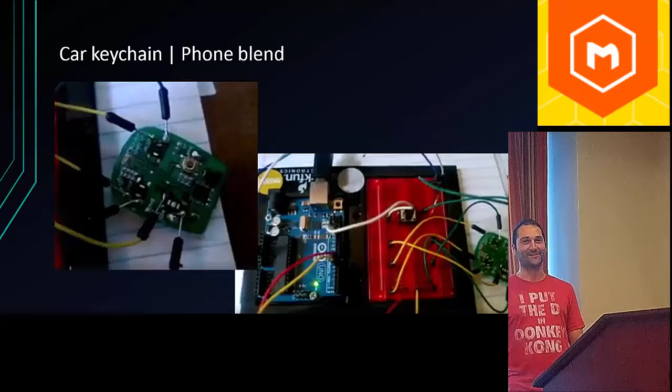So I did. I took it apart, and that little guy is what's inside, and I soldered some wires to it. Well, first what I did was look at the output of the buttons. I started hooking multimeters up to it and seeing what each contact point did, and I figured out that certain contact points went with others, and when you passed voltage through them, it made stuff happen. The car unlocked or locked or set off the alarm for an hour, and then I had to figure out how to turn it off, and that was fun.

This is a video of it. I don't think you're going to be able to hear it. I don't think we have any sound. But what I can tell you, maybe I do. Let's see here. Does the sound work in here? Do we know? It does not. Does not. Okay, so I'll just narrate for you.

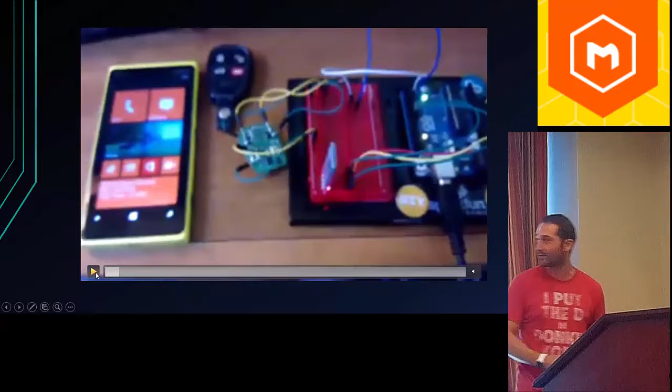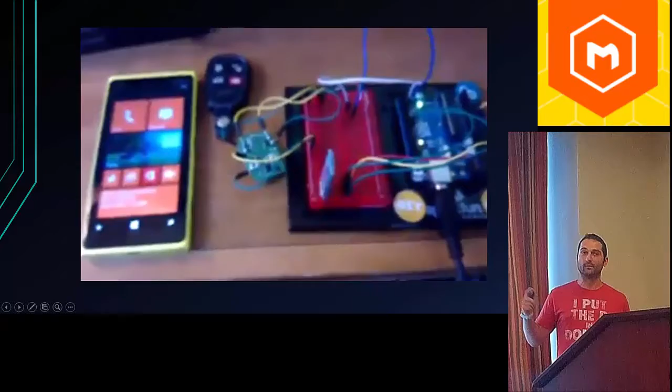That's fine. So I'm a big Windows Phone guy, so I had my Nokia there. The reason I mention this project - I've done a number of Arduino projects, and I won't go through all of them - but the reason I mention this one in particular is because this is the first one that I actually worked with Bluetooth with, and Bluetooth is actually a big part of the project I'm going to talk about today.

This little flashing thing over here, that's the Bluetooth card. It's really easy to work with. There's a serial library built into Arduino. You just new up a Bluetooth serial object and tell it the baud rate, and then you can read from it. It's pretty easy.

What wasn't so easy was the Windows Phone. Nokia was nice enough to make a free, open Bluetooth library that we can consume on the Windows Phone. I still use the same one today, and it's real nice. It makes it real easy for communicating with the Arduino.

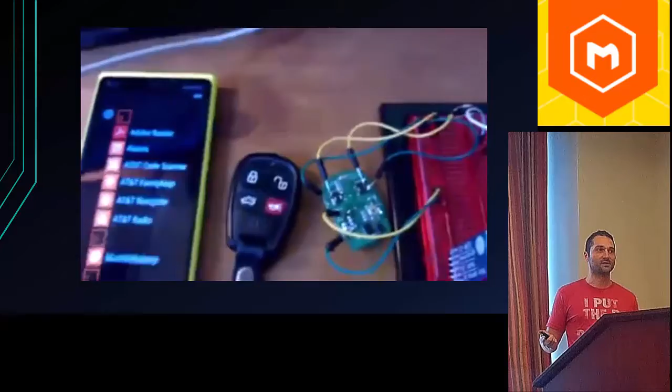And what I do is I just send a command to the Arduino to connect, and then I send a command to either lock or unlock. All that looks like in the code is maybe a number - I just send one byte, or a 2 or a 3 or whatever. And the Arduino deciphers that and then sets the digital pins on and off, and that's what shoots the car off.

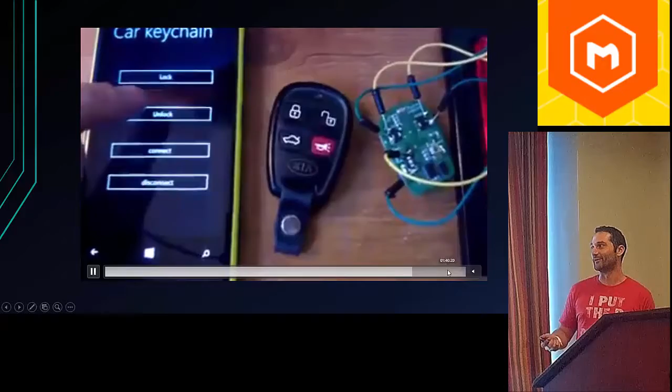And as I was doing this, my alarm was actually going off outside, but you can't hear it on the video. So I moved on to the next project.

So this is going to look weird at first, but I promise you, no dogs were hurt in the process of making this. I needed a camera to watch my dog while I was at work. And you're probably saying to yourself, but Anthony, why in the world would you want to watch your dog while you were at work? Meet ISO.

He's known as the destroyer in my house. ISO is playful, and ISO's fun. ISO's a very good dog. Just kidding. ISO likes to rip nose-sized holes in my blinds. ISO also likes to somehow chew up documents with a muzzle on. Don't know how he does that.

He also likes to create second dogs entirely by himself. That's a pile of fur about the size of him, if you can't tell. Just a side note, when I comb him, I comb until my arm gets tired, and then I stop, not until the fur stops coming off. Just in case you're curious about getting a husky, don't.

So the main reason I needed a camera, though, it really doesn't have to do with that stuff, because I get to find out what he does when I get home. The main reason I needed a camera is because ISO hates his cage.

That's a steel cage that he would stick his nose through to bend the bars, and then he would bite the bars, and then stick his nose through to bend the bars, and then bite the bars, and kept moving back and forth. He eventually broke the cage. He broke through the steel bars to the point where the only way to fix them would be to weld them back together. So I don't put ISO in a cage anymore. That's the long and short of it.

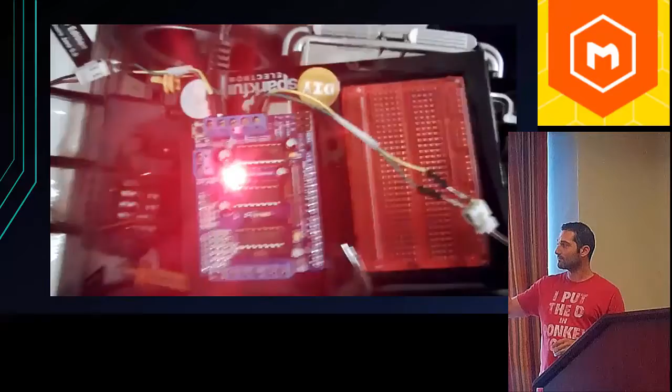This is the initial test of it. What you're seeing here - I promise the sound for the video isn't all that great, it's just the car going back and forth. This is an Arduino Uno, and I have an Adafruit motor shield hooked up to it, along with the front motors of the RC car.

Does everybody know how these motors work? The way these motors work is when you pass current through it in one direction, the wheels will either spin or turn left, and when you pass current in the other direction, they'll spin in the opposite direction and turn right. So it's entirely based on the direction of the current.

That's what the motor shield does - it allows you to pass current in both directions. You can't really do that with your Arduino alone; you'd need extra equipment. Also, the motor shield allows you to pass large amounts of current, since the Arduino limits how much current it outputs through its pins.

So the motor shield let me hook the RC car's 9.6 volt battery directly up to the Arduino, and it just pumps the current right into the wheels. That's what you're seeing here. I have the front motors hooked into one motor on the motor shield, and the back motors hooked into the other, with a program on the Arduino running that says drive forward, drive backwards, turn left, turn right.

And that's it. You can see my hasty power cable - that barrel jack, I love Scotch tape. I could probably put a child through college with the amount of money I've spent on Scotch tape. I use it for everything.

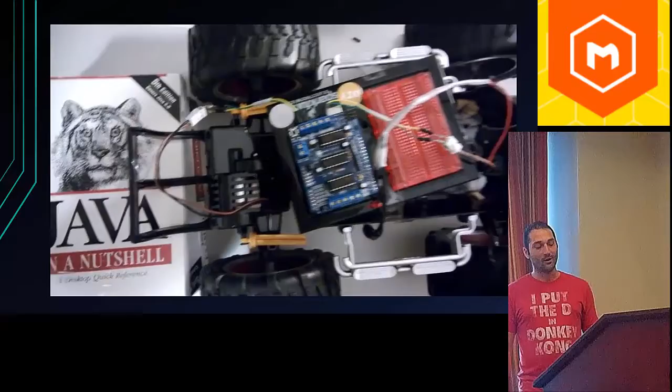When I'm soldering, I'll take the wire hooked up to my soldering iron and tape it down to my desk, so if I accidentally hit it with my leg it doesn't fly into my lap. One thing that doesn't protect you, though, is reaching over the soldering iron for a beer and setting your arm on it - this was a scar from like 2 years ago, so don't do that. Soldering irons get really hot.

The next natural step was hooking my phone up to it. This is the same Windows phone from before, the same Bluetooth library and everything, and I wrote an app that sent basic commands to the car telling it to stop, go forward, turn left, or turn right.

So you're just using Bluetooth to communicate between the phone and the car? That's correct. Now I've advanced the Bluetooth library a bit on my own - it was sending 32-bit commands, and I didn't need to send that much, so I reduced it down quite a bit, which sped it up.

Also, I don't wait for a response - that was one of the other things I heavily modified for this car. I think originally the library was expecting a response from the Arduino, which slowed down communication. I don't need two-way communication, I just need to stream out packets - hey, I'm pressing the forward button, hey, I'm turning left. If they get to the car, great; if they don't, whatever, I don't care if it drops, because there's another 50 coming right after it.

So then this really cool thing happened. This company - I can't pronounce the name of their device, it's Myo or something like that, a Canadian company, Thalmic Labs is the name of the company itself - sent me this really neat armband.

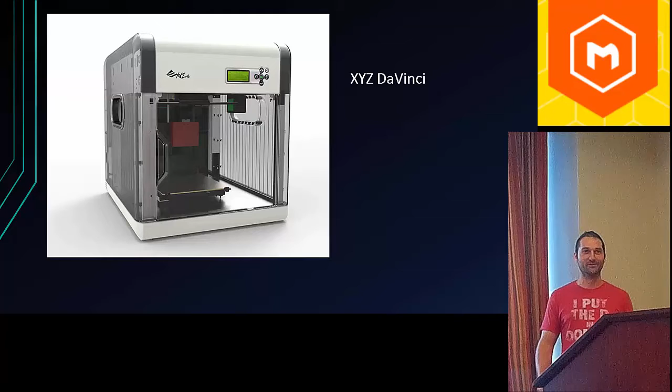One thing I didn't like about it is that they have proprietary filament - you have to buy their stuff. There are some hacks for it where you can get an Arduino; I think there's one on Hackaday where you can reset the RFID chip inside the proprietary filament cartridge, so you can buy off-the-shelf filament and just reload the cartridge. But 3D printing is so new and so open source, and everybody is building their own printers - there shouldn't be proprietary crap yet. We should be able to just build a printer. So that kind of irks me.

The other thing that bothered me about this printer was that it was huge, like huge, and it was cool that I could just take it out of the box and plug it in and it worked. The trade-off is that this thing is like a million pounds. If you're not familiar with the Cleveland area, Micro Center is on the east side, and I live on the west side, so I had to drive an hour to Micro Center, carry this giant box out to my car, jam it in my little Kia, and drive it all the way home. I live on the 2nd floor, so I had to carry it up 2 flights of stairs, put it all together, started printing, and it broke 7 days after I bought it.

So it broke in a manner that... now I'm a pretty resourceful guy. If I could have fixed it, I promise you I would have. One of the Y-axis motors didn't have enough tension on it, and this is a steel box. In order for me to rig it to have enough tension that it wasn't slipping, I would have had to drill holes in the steel box. It was a huge pain in the ass.

So I was like, you know what, it's only been a week, I'm taking it back. I had to carry this thing back down two flights of stairs, jam it back in my Kia, and drive it an hour back out to Micro Center.

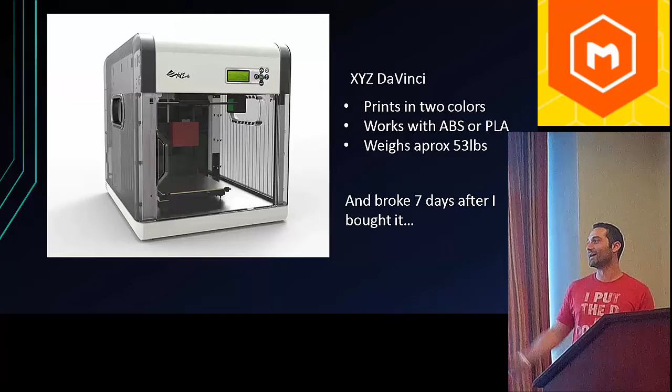It was horrible. So then I bought this, and this thing is awesome. If you get a chance to buy one of these, I would highly recommend it. This is called the PowerSpec Ultra 3D. This is the printer I've been running literally nonstop since November. You can ask my girlfriend, it's always going, you can hear it all through my house, it's ridiculous.

I love this thing. It's based on, so this is like the generic version, if you've heard of the company FlashForge, this is their design. I think Micro Center just kind of bought it, stuck their sticker on it, and made it a little bit cheaper. This printer is awesome. It has Wi-Fi, it has USB, it has an SD card.

The only downside to this printer that I've found is that the software that ships with it sucks, and I mean it sucks bad. The slicing software takes forever. If you don't know what slicing is, it takes the 3D model, the CAD that you make, and slices it up into like a million little pieces, and then you give that to the printer, and that's the layers it does. The software that the PowerSpec printer came with really sucks.

You can't add custom supports in the middle. So if you're trying to print something, and say for example I'm standing here and I needed extra supports from my shoulder to my head, I couldn't add those in. You can only add supports from the printing platform up. It was just bad news bears, don't get it.

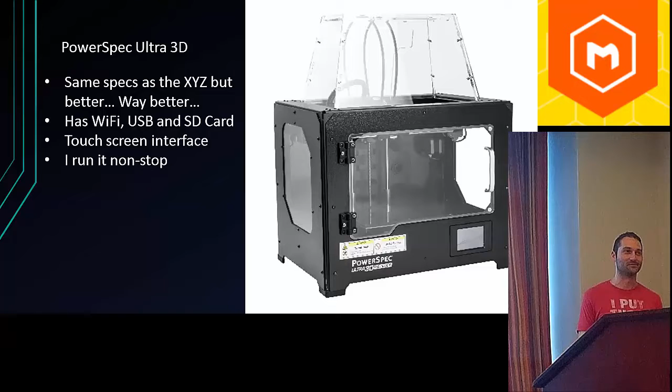So, yeah, those are the tools that I'm going to be using. The M series begins. This is going to be a series of cars that I made, starting with the original one that we just saw.

So I said to myself, anybody can make a kit. I want to build my own from scratch, down to the bolts. So I had some objectives.

The first objective was that it had to be totally designed and printed by me, because I like working with kids. I want to show kids that even somebody like me could build this stuff with free information on the internet.

It had to be easy to reproduce because, once again, I'm assuming people like me are trying to reproduce it. So it had to be easy to do.

It had to be totally open source. I'm not a huge open source guy. I work for a company where we have zero open source. I'm all for profiting, but I like giving back to the community. I think that's important, especially because we all stand on the shoulders of giants. I didn't write C or C#, but I use it all the time. So I feel like it's important to feed back into the community and help build the next generation.

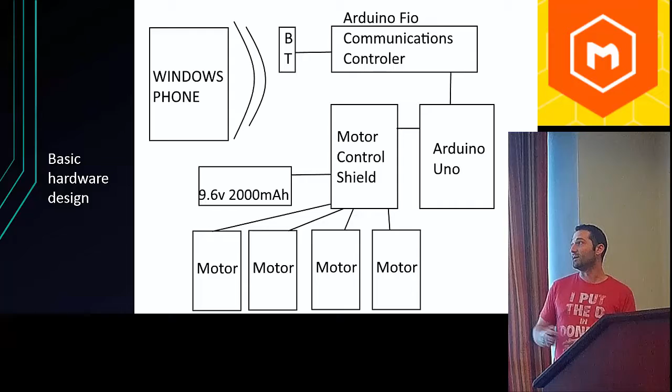The way that I have mine rigged up is, you'll notice here I have four motors, but two of them are plugged into one motor port and the other two are plugged into the other motor port. The reason I did this was because the left wheels are always going to be going in the same direction and the right wheels are always going to be going in the same direction, so why overcomplicate things? Just hook them all into the same motors, then I only have to manage two motor objects in code.

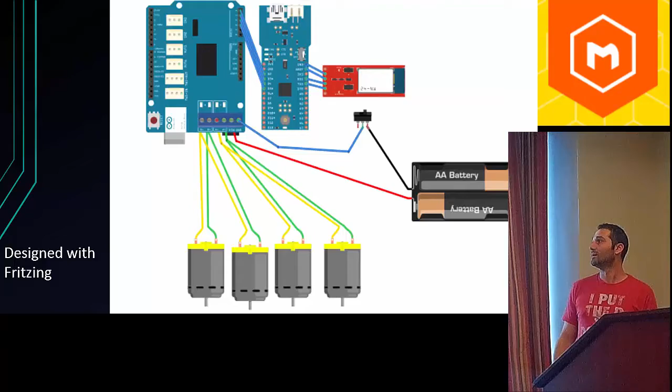And I have the car up here at the end if you guys want to come see it, you can come take a look. So now for the code.

I'll try and go quickly through this. I know we all love looking at code on PowerPoint slides. So the communication layer, I just managed one Bluetooth object.

So back up real quick. The Arduino has 3 main parts: you have your variables, your setup function which runs the first time you power the Arduino, and after that the setup function doesn't run anymore, it just loops forever while it's powered. So in your setup function, that's where you want to initialize your pins and objects, and then in your loop you're running conditions over and over again.

So in my communications layer, in my setup function, I initialize my Bluetooth object and set my 4 output pins. Then in the loop I check: do I have a packet? If I have a packet, I see what number is in there, and then I run the appropriate functions.

Here's my setup for the communications layer, the Arduino FIO. You can see I initialize the Bluetooth, then set my 4 output pins. The output pins are what we're going to tell the motor control what the user is selecting with. I don't know what order these are in because I didn't put the enumeration up here, but one is forward, one is backwards, one is left, one is right. At any given time, one will be high and the rest will be low.

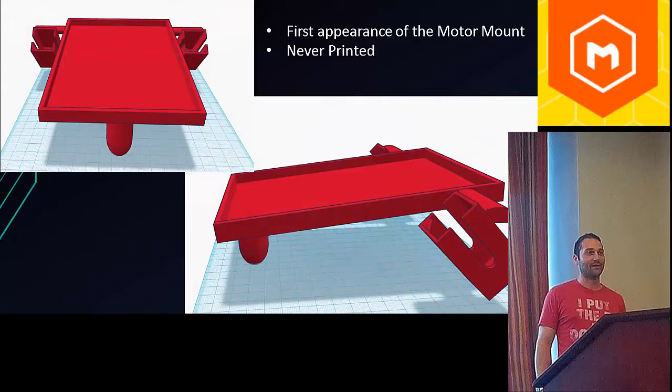So rule number 1 of 3D printing: respect thy support material. That is why this did not print out. Support material is what holds up your print as you're printing. There was no way I could print this without a ton of support material, so this never made it to the printer—it would have just taken a ton.

So I went back to the drawing board and said, okay, I need a modular design. I need to build the motor mounts separately, which means I need some way to fix them to the actual chassis. I didn't want to use glue or tape, so I needed clips or pins or something. And remember, I'm building everything myself. So I did the natural next thing.

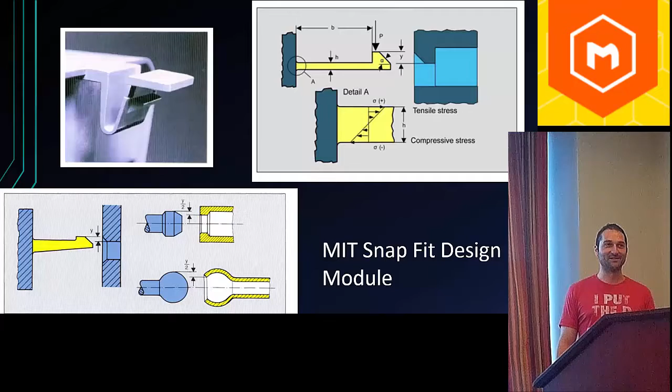I went to Google and found this MIT class, mit.edu. They did a class on snap fit joints and push pins. I started reading through that, and these are some of their designs. They go in nauseating detail about clip design, sizes of clips, angles, filaments, the amount of pressure you can put on clips, the length of the clip, etc. I didn't do all that—I just kind of made clips and saw if they worked based on their designs.

I actually used quite a few of these in testing. We'll see a few of them. That was the first one up there—a push pin, supposed to just push in. This one is actually a hook, supposed to go in and hook in. That sucked, so it never really got off the drawing board. This U-shaped snap I actually used in a couple prints—it ended up sucking. And then this T-slot I used also.

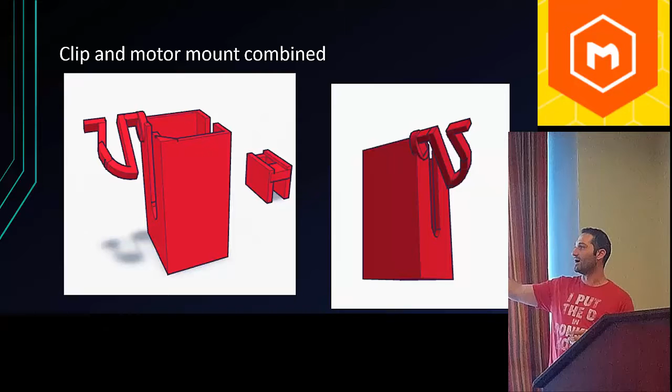And I moved on to the M3. By the way, I have an Iron Man-like fixation, so that's why everything is M—sorry, it's the Mark III. So I didn't like the original clips I did on the M2, so I moved on to using that U design snap. As you can see, I put the snap points on the corners, made sure they were evenly spaced, and everything was the right height.

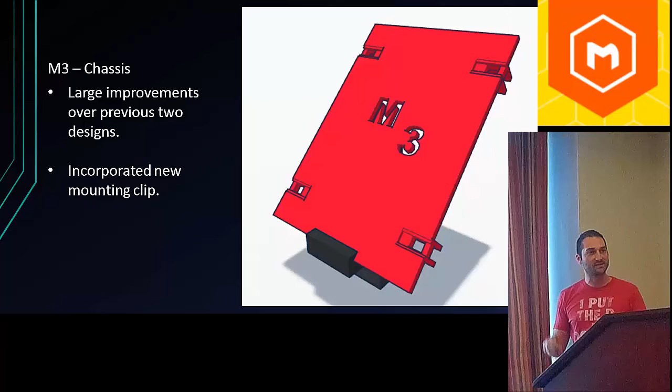This actually got printed, but once I printed it, it became painfully clear that when you apply weight to the top, the U-shaped snaps bow outward. That wasn't apparent in the design process because the CAD software I use doesn't incorporate physics. I had no idea until I printed this out and put it all together—I thought it was so cool, it works. Then I started putting the hardware in, and it bowed out, and I couldn't even drive it. I was so wrecked, because you're looking at probably 15 hours worth of printing, so it's on to the next.

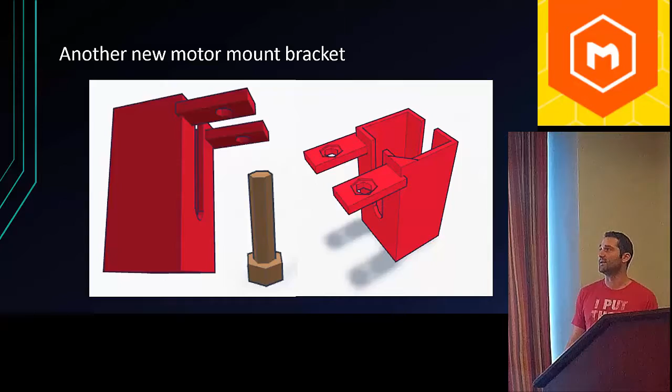So for the M4, I said, all right, enough with the clips, let's use some bolting design. I came up with this—I call it a gravity bolt, because if you turn the car upside down, the bolts fall out, held in only by gravity. I used this mounting system, and it actually worked really well. It created like a rigid body and kept the wheels pretty straight. I had to tweak it a little bit, but the mounts went in there pretty well, and I used this design for quite a while.

It worked by pushing the mount actually into the chassis. That was like a friction thing, and then I pushed the bolts in, and it held together really nice. So I was able to solve other problems, and I moved on to how I was going to fix the Arduino to the chassis.

The first thing I used, I don't know why, I'm a glutton for punishment. I went back to those U-shaped snaps and tried to use them to fix the Arduino to the body, but it wasn't happening. They wouldn't clip in. It sucked. So on to the next one.

The M5. For the M5, I used the same mounting for the motor mounts, and then I started using the T-slots to push the Arduino on and slide it in, and this worked pretty well.

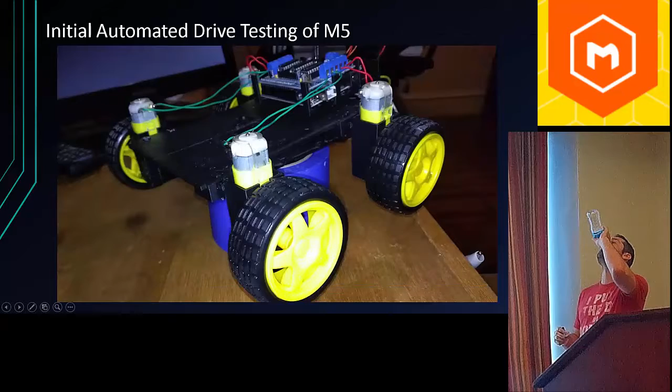The M5 was the first one that I printed out, coded, and actually drove. So here's early testing of it. Let's see it going here. So this one actually worked. I put it on the ground and let it drive across the ground, because that's the natural next step, and it worked pretty well.

So we got a working car, finally, right? It only took me 5 iterations, 5 different models, and I finally got something on the ground and running.

The next thing was to rework the Windows Phone app. I didn't have to rework it too much, it's pretty simple, just a couple buttons that you can drag your finger across. I wanted to keep the app as simple as possible because I remember how intimidating it can be starting out with Windows Phone, so I wanted people to just pick it up and go. So there's the app, pretty simple.

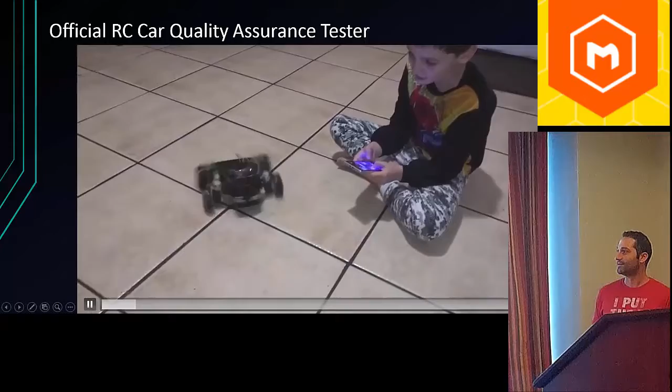And then I gave it to Troy, and I let him drive it around. Now you'll notice this is the M5, and you can see that the battery is actually hanging off the back of the vehicle. Probably not the best idea.

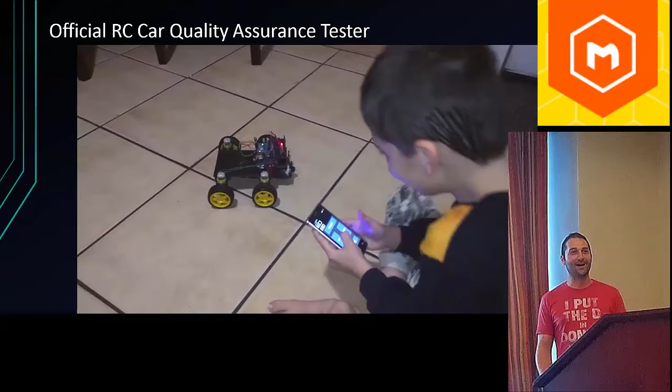Now you're thinking, why did you do that? That clearly doesn't make sense. Well, because I have an Iron Man fixation and I wanted to have M5 on there, and clearly M5 had to go in the center of the chassis, so I couldn't have a battery pack over top of the center, because that would cover up the M5. No brainer, right? Unfortunately, this caused the car to do wheelies a lot when you would drive it around, and things would shake and make it unbalanced, turning in weird directions. So the car was good, but the weight distribution was bad.

The code was lagging because of the serial output, which I didn't realize at the time. So we're on to the M6.

Now for the M6, I decided I could put it in the front so I could make the battery go in the center. I kind of took that hit. And as you can see, I'm back to the U-shaped clip design, because I'm once again a glutton for punishment. That broke immediately, by the way. That didn't work at all. As soon as I clipped that on, the things just snapped off. So I think that's the last time I used those. I hope so.

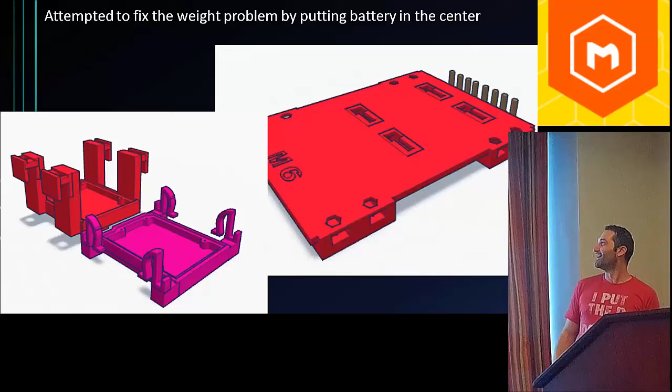This is what the M6 looked like when it was all put together. Note that the battery's over the center.

Unfortunately, this worked, this got printed, and I actually put this on Hackaday. When I got this printed out and put together, I was like, oh, this is the final one, right? I can just improve from here, just mod it a little bit. But when I took this to a couple different events, like a hackathon, and started driving it around, when I would turn, it would send the battery flying off the car, because the battery wobbled in there, and it was in the center, and it just was a bad design.

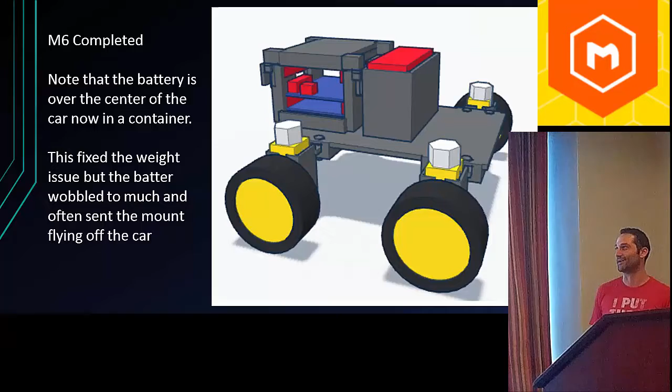I wish I would have gotten it on video flying apart, because I hated recording my mistakes. Eventually I got to the point where I started recording my mistakes because it's funny to show in presentations, but I didn't feel that way at this time. So I didn't record the death spin that sent everything flying apart. In hindsight, I probably should have, but that's the M6.

So on to the M7. The M7 is the ugly child. I don't like this one. Rule number one, right? Respect thy filament. This was a horrible design. I'm not afraid to say that.

When I printed this, it had like a million pounds of support material. It was hard to get the components in there. This actually was so bad that when I built it, when I went to take it apart to get the components out, I actually broke most of the components. I had to rebuy a lot of stuff. The solder points ripped off, and it was just a shitty design, horrible. But that's why we do this. We make mistakes, we grow.

The current version, the M8. This one I'm really excited about. I worked really hard on this over the last couple months, specifically for the M3 conference. This gave me a great reason to revisit the idea and redesign it.

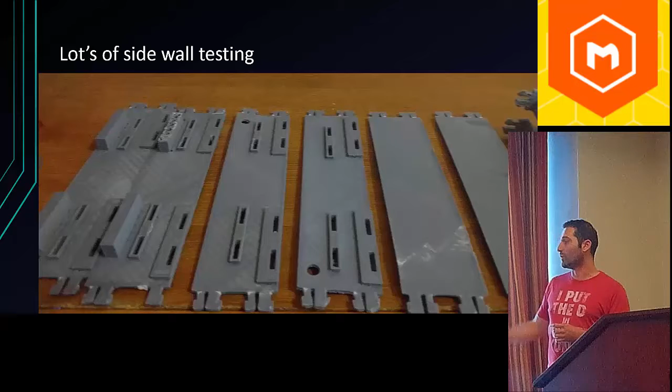These are the sidewalls. This is the snap that I ended up going with, so you'll see it everywhere - the sidewalls of the car, the front and the back. This is early construction, early designs. This is not the final product. These ended up getting shaved a little bit, but that's kind of how it goes together.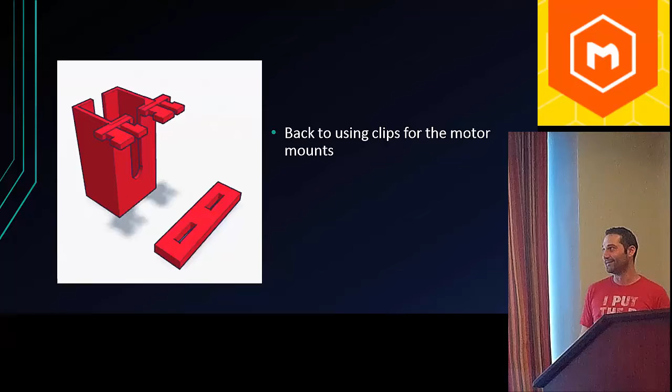I'm back to using clips again for the motor mounts in the early designs of the M8. That's key, early designs in the M8. This is how it all looked once it was in - well, this is early design of the inside the box. I wanted to see if it all fit inside there, so I just kind of threw it all in.

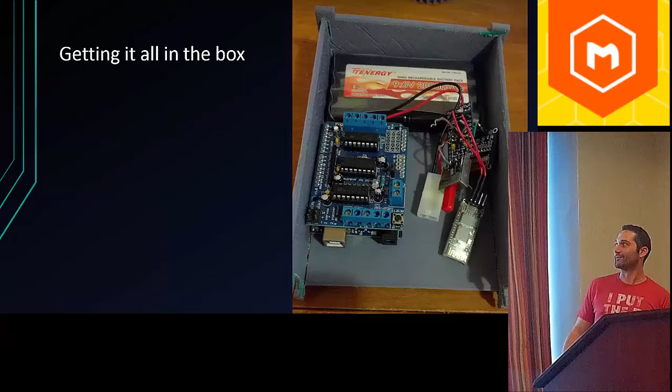And then, you know what, even after 8 models, countless prints, I've been printing these things since November. It's not so easy to get it right. As you can see, the wheels are bowing out. You would think that I would be able to fix these things at this point, but no, that's what happened. And that was probably like 20 hours of printing to get it together to find out that the wheels bowed out.

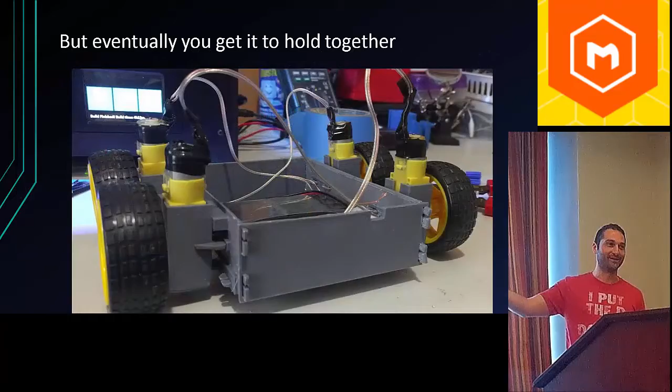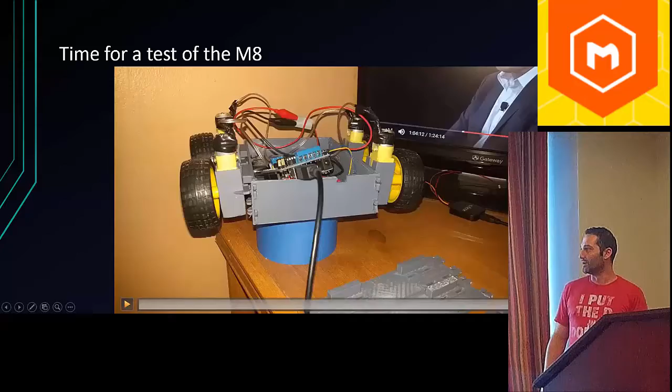So, kind of heartbreaking. But then we came up with this design where we had these little brackets in, and I moved the clips down. And you know what? It went together. This is the first test of it. So you can see that the wheels are straight, and got the Arduinos packed in there, and it worked.

For some reason though, I don't know if you can tell or not, but this wheel over here wasn't spinning at the same rate as everything else. It was kind of starting to spin and then it would stop. So I could have looked at it in code, but that would involve putting serial debug points and all that stuff in there. So I broke out my logic analyzer.

Has anybody here worked with this logic analyzer before? All right, good. I'm happy to be the person to bring this to you, because when I saw this, this was like a holy shit moment in my life. You have no idea. This thing is awesome.

This is like a debugger for the physical world. You can take these probes and put them on contact points and record on the computer. They have an application that comes with it, and you hit record for about 10 seconds, and it records what's coming off those contact points.

If that isn't cool enough, say I'm trying to reverse engineer a remote control. I can hook this up to it, and if it's a serial line putting actual data over it, it'll decipher the data for you. If you're putting ASCII text over it, it'll say these bytes align to ASCII text, these are the letters. This device is awesome, can't recommend it enough. It's about $100, a little pricey, but I use it in every project now.

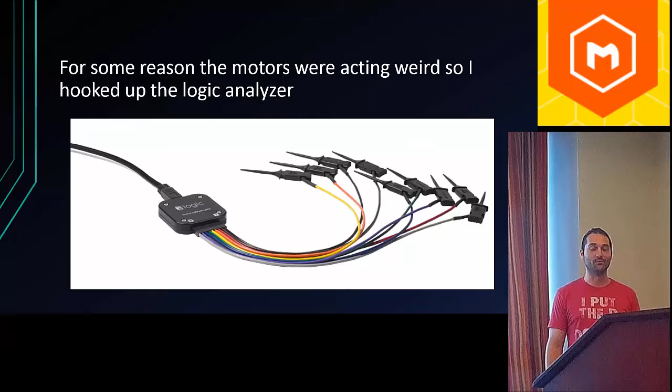So I was able to easily determine that the solder point was bad. That's not something that's easy to figure out in code — you might be looking at the code thinking it's right, it's turning on, why isn't it working on the motor? You might determine your motor is bad, but you don't know, you could be totally wrong. So I used it to quickly figure out my solder point was bad, and it saved me a ton of time. With that fixed, I was able to do my first impact test.

I do impact tests with all my cars, just so I don't get out someplace, run it, and make me look like an idiot because it runs into a wall and breaks into a million pieces. So I did an impact test with this one. Luckily, I recorded it because it was hilarious.

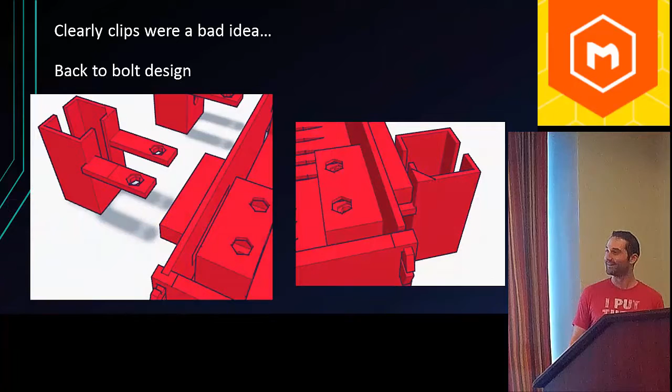So the final design of the M8 — this is what you're able to go and download. I posted this on GitHub just a few hours ago, put it on Hackaday with instructions. It's on my blog, all the code, all the STLs. Everything is open source. I highly encourage everybody to go check it out, print it for yourself, mod it. I have a couple mods I'm working on right now for it.

Like I said, I work at Highland, and we shoot Nerf darts everywhere, so I'm working on a mod for the front to pop it off and put a Nerf dart collector on. It would be really easy to do — all I have to do is make sure my Nerf dart collector has the same clip design, matches the width, and you can just clip on whatever you want.

So this is the final design. It comes with a lid. I apologize, I tried to print this out in clear — I have a picture of how I printed it in clear, but it doesn't work for some reason, I don't have the right temperatures. I woke up in the morning after printing the chassis in clear, and it was just a pile of goop. So I'm sorry, you only get a gray version to demo.

So this is what I printed. You can see that there's a lid and that the motor mounts slide through inside.

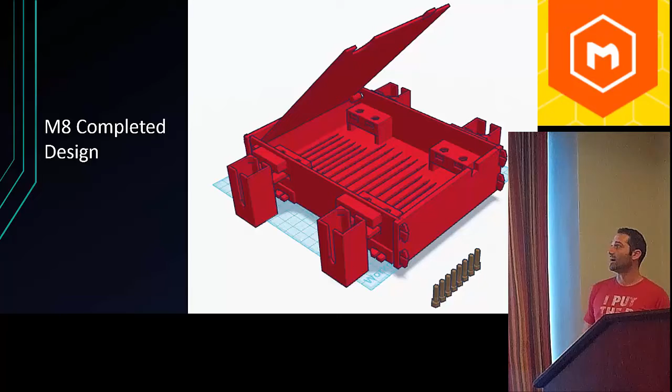All the chassis pieces can be printed flat, which, if you've done any 3D printing, is really nice. You don't need any real support material, only a little bit on the chassis and a little for the motor mounts. The car can be printed totally enclosed.

I didn't get time to print a lid, but it should work. I don't see any reason why it wouldn't, famous last words, but if it doesn't, fix it and send it to me and I'll add it. The motor mounts fit snugly against the side of the vehicle, and we'll see in a second how nice that connection is. The components fit comfortably inside the vehicle as well.

So this is what it looks like blown out. These are all the individual pieces. You can see the sides, how they clip onto the chassis at the base. The chassis is one piece right here in the center.

Underneath these motor mounts, where they bracket in, you can see that's where you need a little bit of support material. I usually print these motor mounts standing up, so you need a little support material for the brackets themselves. It's not a ton.

You can see, first you take the chassis and clip the sidewalls on, then clip the front and back onto these sidewalls, then put the motor mounts in, and slide the bolts in. It makes a really nice rigid frame. You can spin this car all day and it's not going to come flying apart, which is really nice.

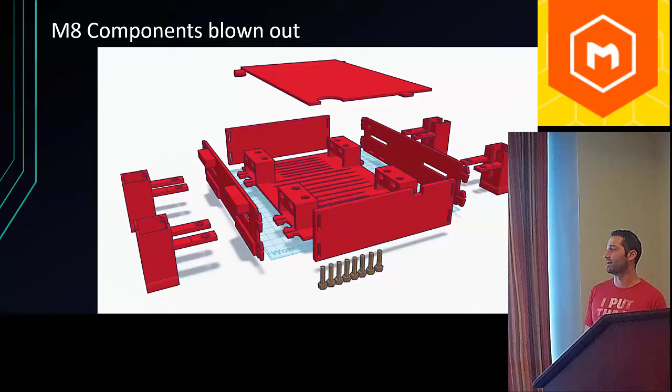Then the lid just clips into these holes on the side, and I create a little notch on the front that the lid can clip down on. So there is the new M8 chassis design.

It's vented. I did this for a couple reasons. I noticed my Arduino was starting to build up heat, so this adds a little bit of heat distribution as the car's driving. Also, it saves on filament and saves on weight. It was a good design.

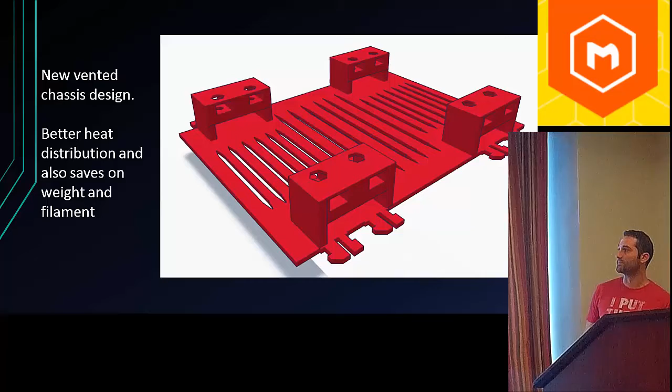It's not very flexible. I mean, it's flexible without everything connected together, but once you connect everything together, it's pretty solid. There's how it clips together. The motor mounts just slide in there.

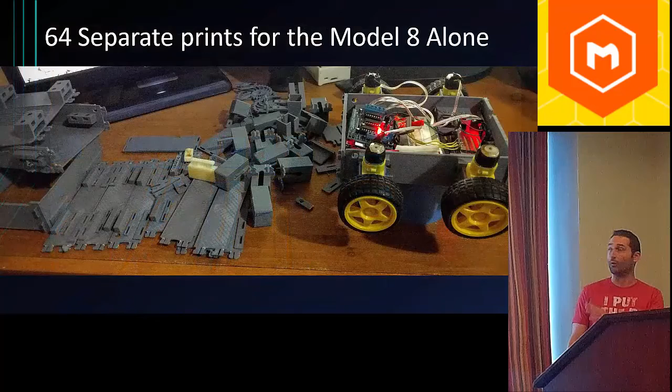For this print, just for the M8, there were 64 separate pieces for the M8 alone, and that doesn't include the ones that failed. There were quite a few prints for this.

So some parting thoughts for you. Nothing that you build and design yourself is going to be easy. You're going to have to do it over and over and over again, it's just how this works. Stick with the problems. If I can offer any advice, it would be to work through the problems, because every problem I've worked through, I've learned a ton from.

Be ready to ruin your hardware. That's going to happen. If you're working with Arduino, eventually you're going to ruin stuff. You're going to see magic smoke, and it's not going to be fun, but that's just how it goes. And buying a 3D printer was totally worth it, so if you haven't bought one yet, I recommend buying one or building one.